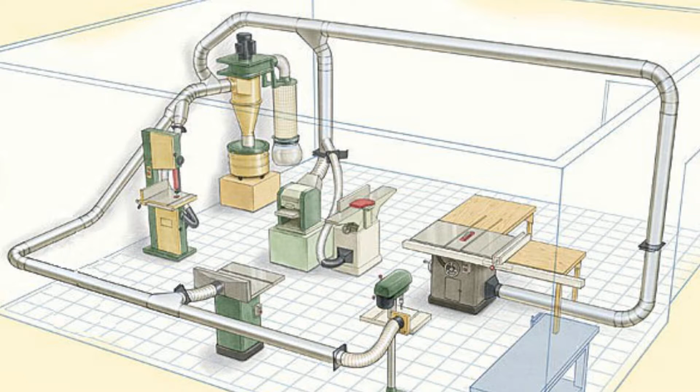Whenever tools come in contact with material, some type of dust is usually produced. We see this so often, we usually don't give it a second thought, simply because in most cases, the dust seems of very little significance other than being a nuisance. Unfortunately, this is not always the case, as in certain circumstances, airborne dust can result in a flash fire and even explode. This training explains what circumstances are dangerous, what is being done about it, and what we are looking for you to do.

Naturally, we all know wood will burn, yet we don't ordinarily think of wood dust as potentially causing a flash fire, much less an explosion. In certain circumstances, a cloud of wood dust could behave as if it was flammable gas, able to cause flash fires and explosions. These flash fires and explosions of wood dust have caused extensive damage, injuries, and even death.

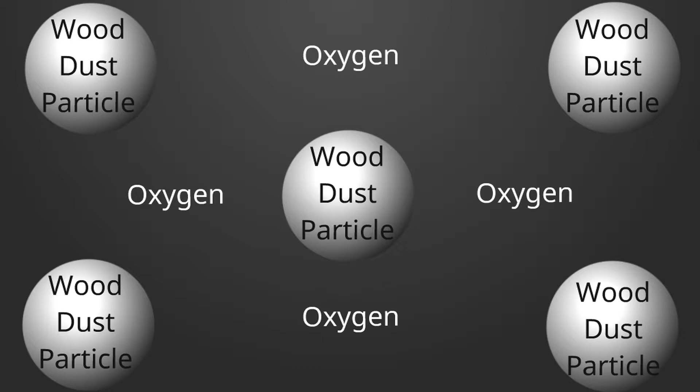The reason why wood dust is so much more dangerous than solid wood is the ratio of surface area to fuel. Oxygen is the factor required to accelerate burning. Suspension or a wood dust cloud is necessary for a flash fire or explosion. This allows a high rate of burn, as the wood dust particles are continually exposed to ample volumes of oxygen.

Looking at the opposite situation, embers smolder in a pile of wood dust simply because they cannot get enough oxygen to burst into flames. To put it another way, have you ever tried to light a log on fire without using kindling? It is almost impossible. Yet, starting with the same amount of wood in 1-inch diameter kindling instead of a 6-inch diameter log, a much greater surface area to fuel ratio starts much more easily.

A 6-inch diameter by 1 foot long log will burn for a few hours. However, the same volume of kindling with a higher surface area to fuel ratio will burn for a few minutes. The same weight of wood as a cloud of fine dust, a few thousandths of an inch in diameter, has a huge surface area to fuel ratio and will burn in less than a few thousandths of a second. This is the type of dust typically produced by sanding operations.

The fine dust contained in a 6-inch diameter, 1 foot long log, if distributed as a dust cloud and confined in a space about the size of a 2-car garage, if ignited, would level the adjacent house. Our plant has one of the highest concentrations of burnable dry wood in the industry. Therefore, to prevent our workplace becoming the next sad example of a dust explosion, we must recognize the hazards and do what needs to be done to handle this issue safely.

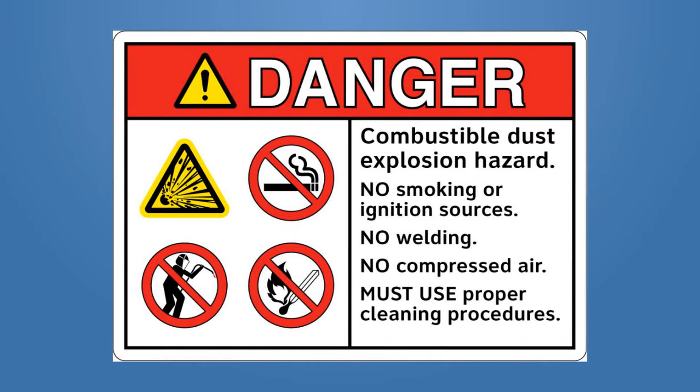As a start, dust is tested to see how easily it will ignite and explode. This information is then used to design the safety systems, focusing on prevention, containment, and recovery of any fires that do occur. We will now review each component of the fire pentagon, along with the steps to work safely. In our case, of course, the fuel is wood dust.

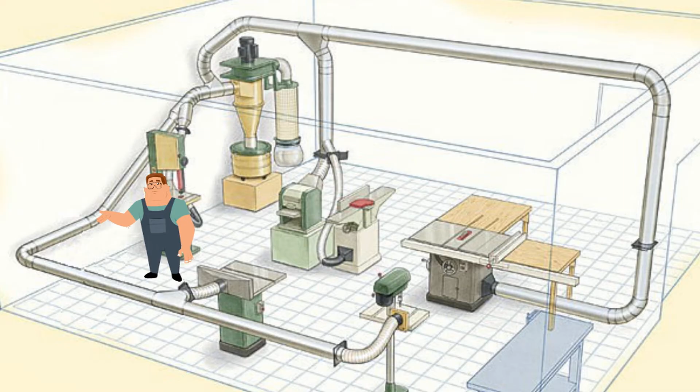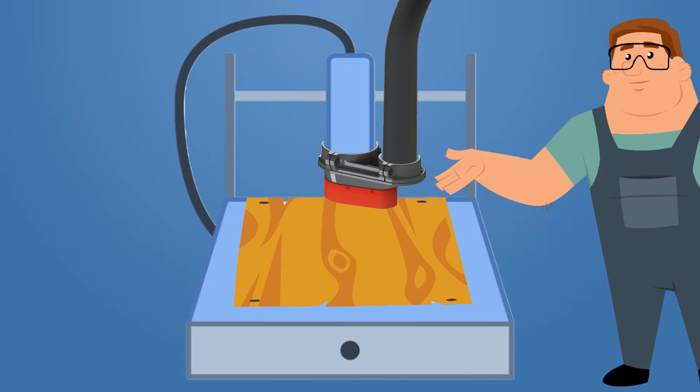We need to keep wood dust where it belongs, using the dust collection system every time dust is produced. We must ensure dust hoods are tight and there is ample extraction to capture all the dust. Address any escaping dust in a timely manner, including facilitating cleanup and the repair of any defective equipment. Most importantly, deal with accumulation of dust with routine and regular housekeeping.

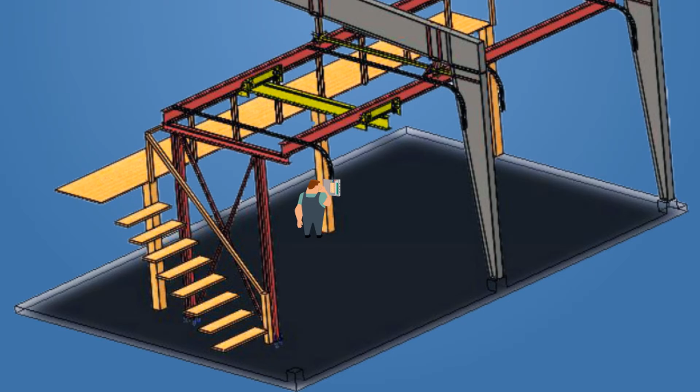As a rule of thumb, if the color of the surface cannot be seen through the dust, there is too much. This ongoing housekeeping is essential, as most destruction and fatalities are a result of secondary dust explosions. This occurs when accumulated dust is disturbed by an initial explosion, creating further dangerous clouds of dust. As oxygen is 21% of the air we breathe, there is little we can do to reduce the hazard of oxygen. Therefore, the focus is on reducing the other hazards.

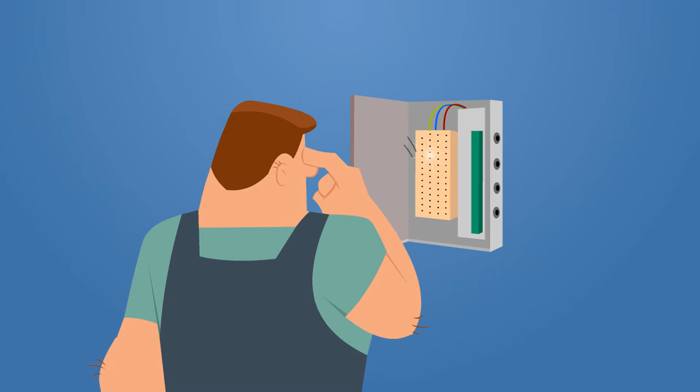Wherever possible, we must avoid and minimize all potential sources of ignition, sparks, heat, and hot work. An electrical spark can be static. A person walking in non-conductive shoes can create enough of a spark to ignite a dust cloud, or arcing, like a contact that is burnt. We need to make sure everything is grounded and bonded to dissipate any potential electrical sparks and that people are in conductive shoes so static charges are not generated.

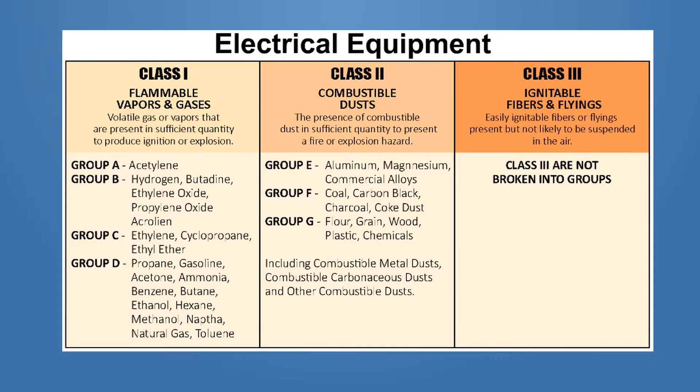Electrical equipment needs to be appropriate for the area and checked to ensure it is in good condition. Electrical cabinets must remain sealed from dust and regularly inspected. All personnel must be on the watch and report any observed sparks.

Mechanical sparks are generated by metal-to-metal contact, such as a rotating tool hitting a guard. Therefore, especially when we are cleaning and inspecting, we must look for and immediately correct any loose guards. Further to this, wherever possible, we must make the changes required to ensure it is next to impossible for guards to contact tools, such as never using expanded metal to make guards.

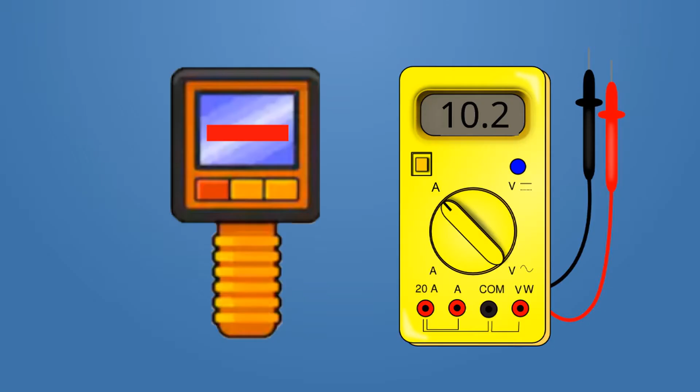High heat is best detected by operators being aware of their equipment, especially while cleaning and inspection, being careful to note any unusual heat, odors, or noises. Our maintenance program must also make use of thermal imaging and amperage readings to ensure equipment is operating normally.

Hot work is surprisingly the fifth most common cause of dust fires. This is the work only occasionally done, such as when open flames are used to thaw pipes. Hot work also includes the heat of welding and the creation of sparks, such as when grinding and cutting. An authorized hot work permit is required any time hot work is to be done. This requires many things, including nearby fire extinguishers, the cleaning and wetting down the area, and posting a fire watch.

Dispersion is the creation of a wood dust cloud. This cloud could be the result of a burst of compressed air, wind entering the building, holes in the dust collection, aggressive sweeping, or even excessive forklift speed. Obviously, some dust will blow around. It is when the dust cloud gets so thick that a thumb cannot be seen at the end of a fully extended arm that it is dangerous.

However, to minimize the danger, we minimize the dust by not letting the dust escape from where it belongs. This requires the ongoing diligence of us all, but especially the operators and maintenance staff. We are counting on you to quickly resolve any dust escapes and minimize any accumulation of dust.

The cleaning up of wood dust is best done with a vacuum first, followed by gently sweeping to limit dust dispersion. Small pockets of dust and dust on clothing can be removed with an air gun not exceeding 15 pounds per square inch.

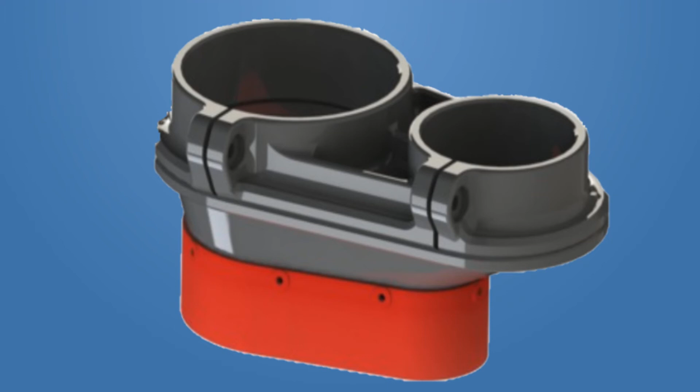The dust collection system is our key to keeping dust where it belongs. Therefore, it is critical the system and collection hoods are well designed and maintained. Hoods must surround the cutting point and direct the airflow. The aperture must be of a size to ensure the airflow is fast enough to grab all the dust.

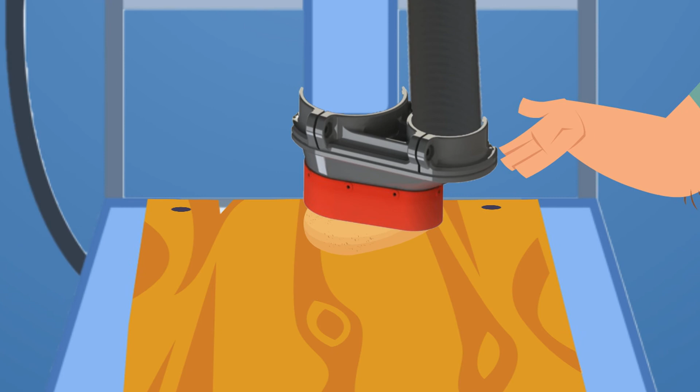Larger wood particles are easier to grab than smaller ones. Therefore, the dust that escapes is often too small for the eye to see. Consequently, operators and maintenance staff must be diligent in ensuring the dust hoods are always installed and operate correctly.

A well-planned and practiced emergency procedure could prevent a minor fire from becoming a major disaster. If a fire breaks out, your actions are critical. Raise the alarm. Do not put yourself at risk. If the fire is severe, contact the fire department. If the fire is within your capability, use the available firefighting equipment.

Ensure you always maintain at least 2 safe routes of escape. Attempt to direct the fire away from materials that would spread or intensify the fire. Avoid creating a dust cloud by using a fog nozzle or an extinguisher suitable for electrical fires.

After a fire, follow the documented recovery plan to as quickly as possible resume shipments to customers. We also need to evaluate and understand what happened so we can prevent it occurring again. This concludes this training on what we are doing about the dangers of wood dust flash fires and explosions.